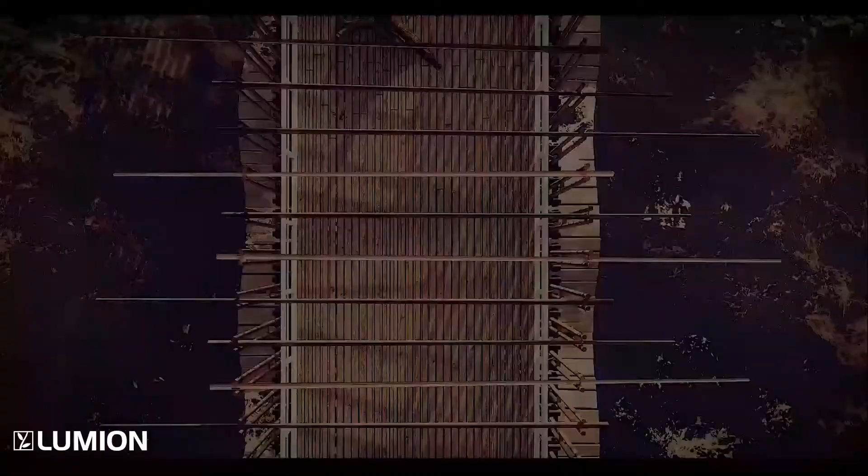I see interior architecture as a broad and limitless subject. For me, it concerns the creation of all space in general. It's a field welcoming of experimentation and reflection.

The line between art and engineering exists only in our minds. The words of Theo Jansen, whose works have been an inspiration for this project, capture the design's main idea. I wanted to create an experimental space that would redefine the notion of architecture, enhance it with other qualities and meanings, creating a new experience. The characteristic of architecture that stood out to me the most was its stillness, its grand presence. I wondered what would happen if into all that stillness one introduced its opposite: change, dynamicity, and movement.

The Quaver is located on Orłowski Pier in Gdynia, Poland. The idea was to create movement in the design by introducing mechanical structures as its construction base. The motion-giving factor would be the construction's interaction with the environment, in this case, the sea waves. They move the design's individual wooden modules. This approach unites the architecture with its surroundings and creates a feeling of a living machine.

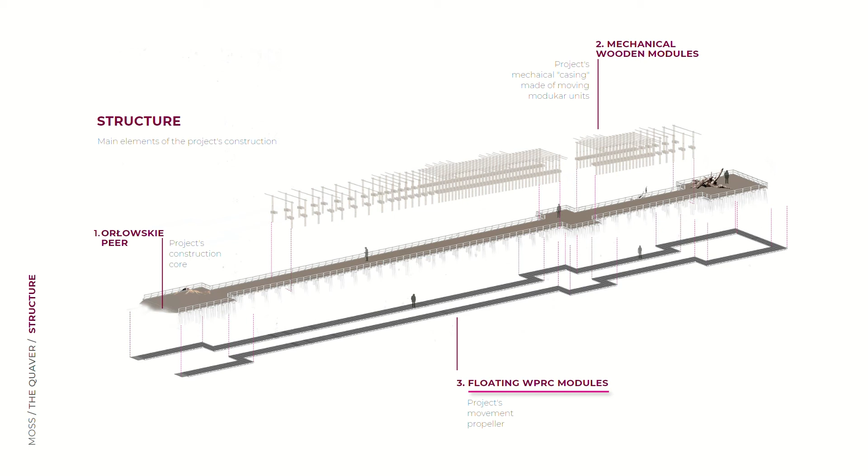The name Quaver comes from the unstable nature of the structure. The design consists of three main parts, of which the pier is the core. The three parts include the main deck area, where the main utility sector is placed, the body of the design; the mechanical wooden modules; and the design's engine, the WPRC floating deck, which allows sea waves to move the structure. The height of the wooden modules allows one to walk safely underneath them, even in the case of waves of non-average amplitude.

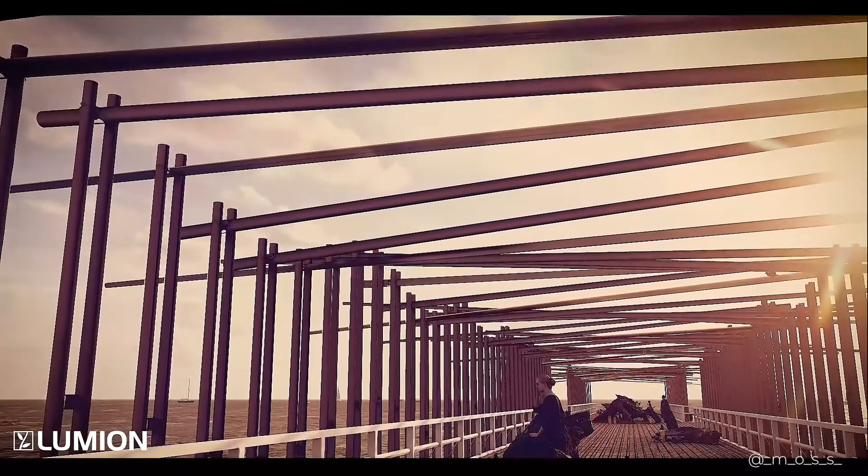Sea waves cause the movement of individual modules of the Quaver. Analysis of the characteristics of sea waves at the location, Orłowski Pier, and research conducted on patterns of sea wave movement led to the final design of a single mechanical module. Its symmetrical construction allows for independent movement of the left and right columns, allowing different waves to determine the structure's movement at the same time, making the movement more organic and unpredictable in character.

The WPRC floating units assure a beam's buoyancy and allow each side of the module to follow the individual up or down movement of a sea wave on either side of the pier.

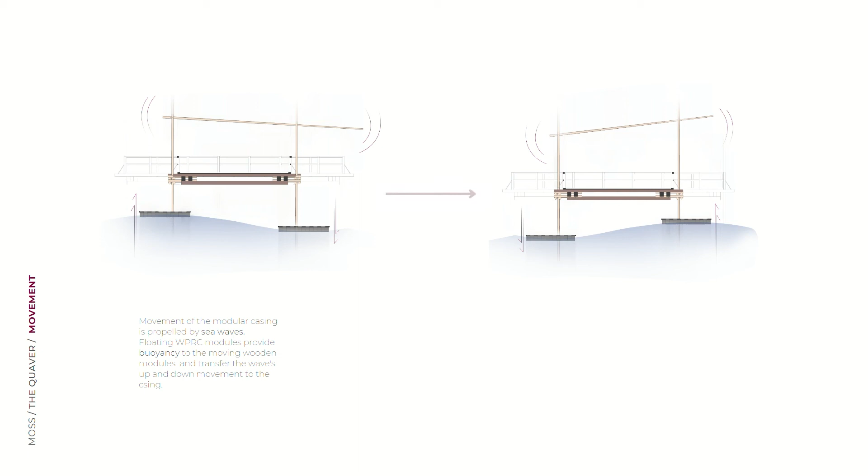The main parts of the machine, which encapsulate the pier, were created with individual mechanical moving units, where construction can be divided further into three main components. The first are the wooden beams, which articulate the movement transferred onto the mechanical units by sea waves. They create the quavering tunnel surrounding the main deck of Orłowski Pier. They can move individually due to the use of self-lubricating wooden bearing systems, connecting the horizontal beam with the vertical beams.

The second component are the WPRC floating, air-filled modules attached to the bottom of each vertical beam, keeping it afloat and making it possible for sea waves to move the mechanical unit. The third component serves a crucial stabilizing function of the former two components. It is a wooden crate attached to the base of Orłowski Pier, guiding the vertical movement of the wooden beams, inhibiting any horizontal motion.

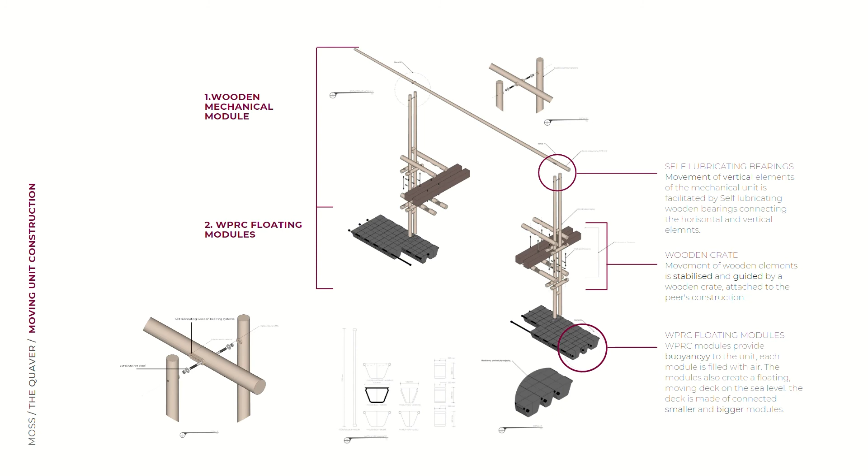One of the goals of the design was to create an experience of walking through or exploring a living structure, experiencing architecture in its dynamicity. The machine was therefore divided into two main utility sectors, placed on the main deck and on the sea level.

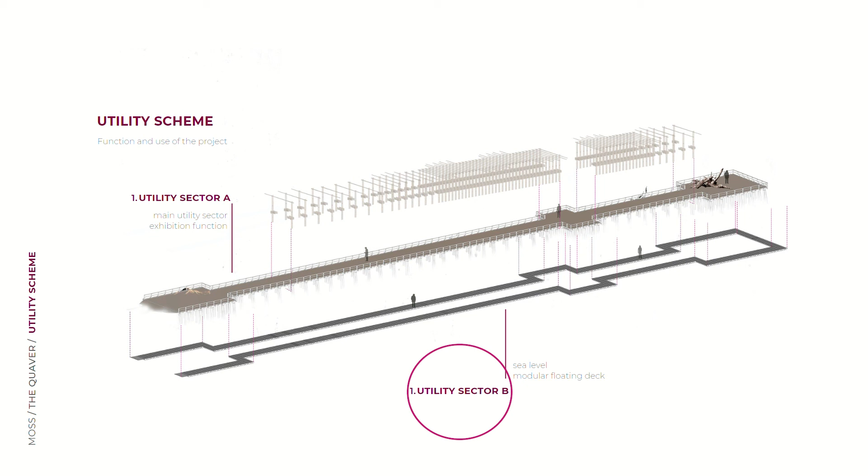In Utility Sector B, one can see the machine from the perspective of its engine by walking on the floating deck of WPRC units at sea level. It requires one to interact with the sea as well as the structure.

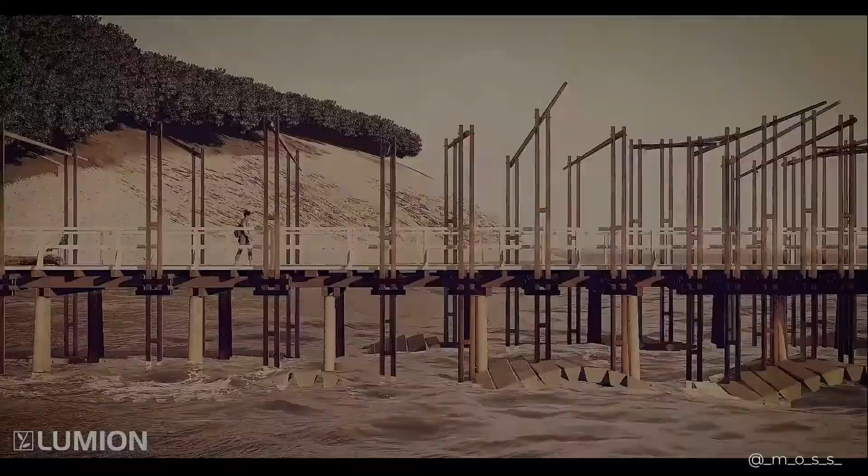Utility Sector A, the main deck area, allows one to see the core of the structure from within. The environment acts upon each beam, creating a cascading effect in the tunnel. The path through the core leads to the open view of the sea. Along the way, one can rest on special benches, replaced with raw wooden logs, or interactive natural sculptures.

Low carbon footprint of the project was an additional objective. It was measured by the carbon footprint of its materials. Therefore, the main materials used were locally harvested spruce logs, subject only to barking, wood used in self-lubricating wooden bearings, a minimal amount of construction steel, and finally WPRC, or wood plastic recycled composite.

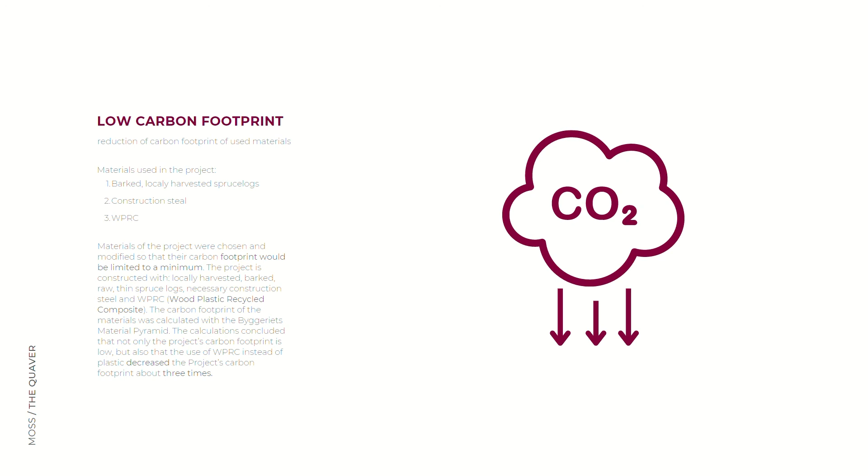The use of WPRC instead of plastic lowered the potential carbon footprint of the design threefold, as calculated in the Byggeriets Material Pyramid. All materials used are subject to recycling.

And finally, the best way to conclude my presentation of this project is to quote Theo Jansen once again: the line between art and engineering exists only in our minds. Thank you.